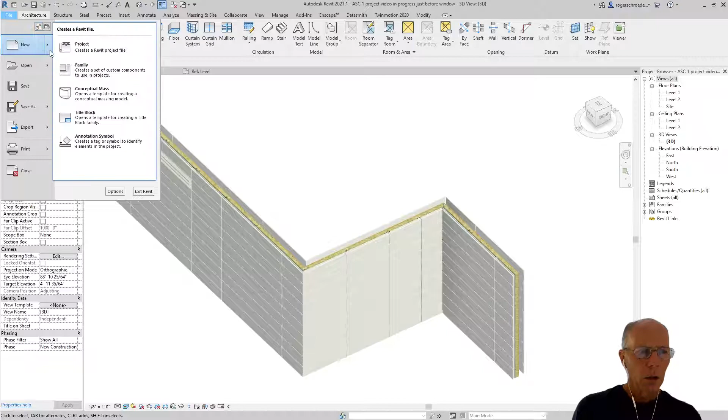So let's go ahead and actually open up a new family that is a window curtain wall. And when we do, we'll see we're presented with the floor plan view, and you can see where it labels the exterior. This is the plane of that curtain wall construction, the reference plane, and it helps us delineate where the front to the back is.

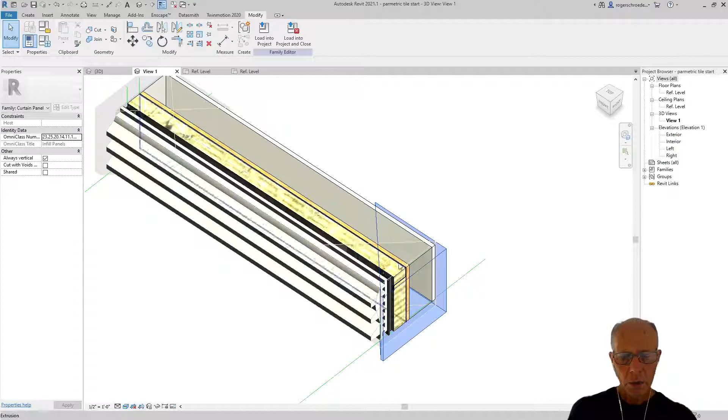And if we go back to the actual panel that we're making, we have to figure out where that reference plane is also with respect to that. And this is the whole key to why I really want to go through the details of rain screen components, because this idea of window placement, how it looks, how it is with respect to that exterior terracotta tile and the interior wall, I think are all really critical aesthetic decisions that you make.

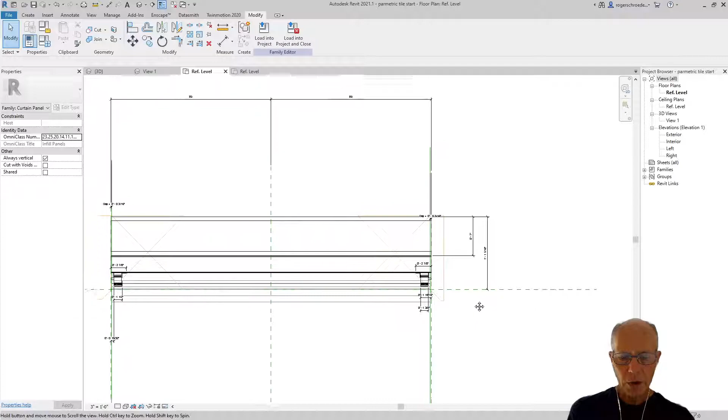So here we have the reference level on the tile system that we're using with respect to the curtain wall panel that we're doing. And so everything moves backwards from that face of the flat panel, and it moves back 1 foot 1 1/16 inches. And then I've dimensioned also to the face of the drywall on the interior. And this plywood sheet here, that's the extrusion of the airspace. I'm having a hard time grabbing the specific. That's the plywood panel. And so that assembly is 7 inches thick.

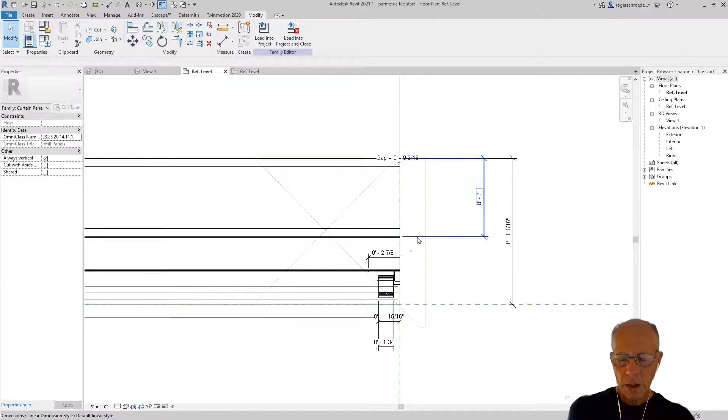So just some relative dimensions that we want to use so that we understand where our glazing is and how much depth we need for our frame. The important thing of the 7-inch depth is that's where the flange would come over to catch the window system on the face of the assembly, so to speak, the plywood or whatever other exterior sheathing might be involved. So we'll move back to the reference plan of the window that we want to create, and right away I'll do a save as.

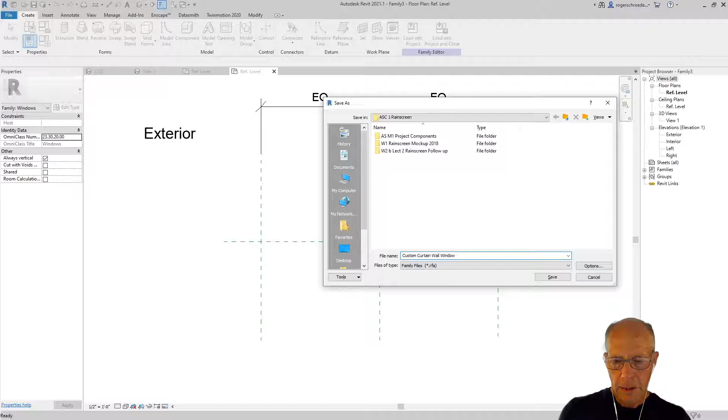We'll say this is a family, and we'll call it custom curtain wall window. And I'm going to add a reference line just for clarity, and we know that needs to be 1 foot and 1 1/16 inches away from the interior. So here we have the face of our terracotta flat tile, and then the interior part of the wall. So we know we have to cover that gap with our jamb.

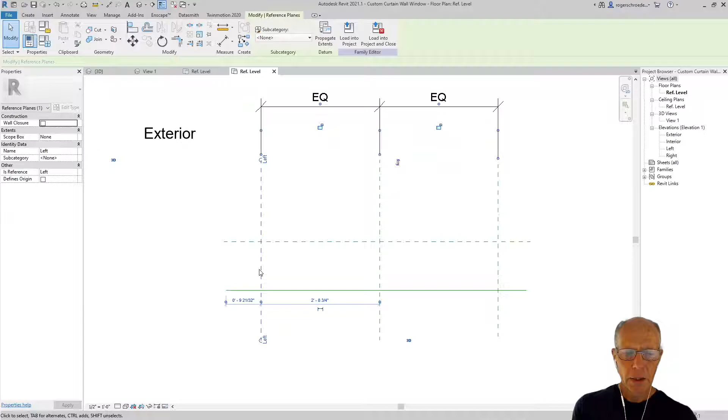So in order to create that window system, we need to have a profile that we can extrude around that. So we're going to use a profile. We're going to have to construct some sort of a profile based on those dimensions. And we'll get started with that, and then we'll extrude that around this shape. So the next thing I want to open is a profile. I'm going to open up a new family.

And I wish I was always going into my Imperial. I got to fix that.

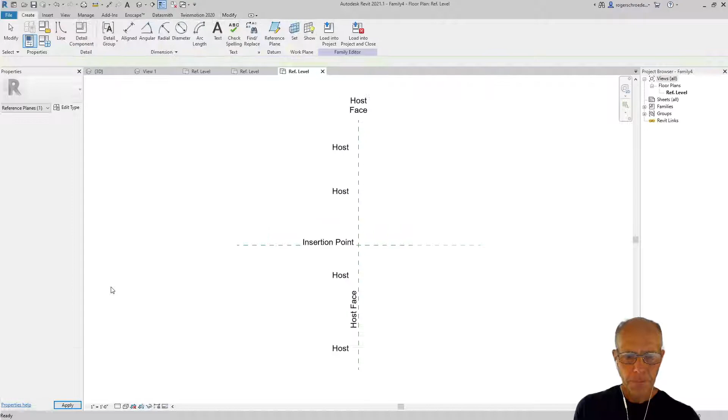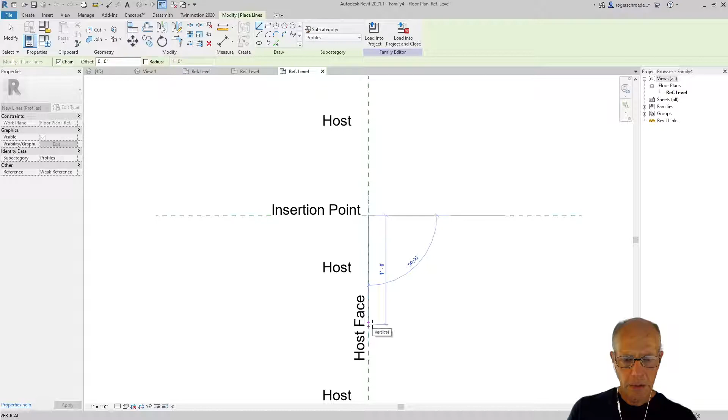And we're going to get a profile hosted, insertion point, host face. These always confuse me a little bit, so I'm not going to be overly critical, because I'll usually have to go back and make a little bit of a correction. So once again, let's just start drawing some lines so we can get an idea of where we're working here. So I'm going to draw a line that is 1 1/16 inches long. Let me just modify that.

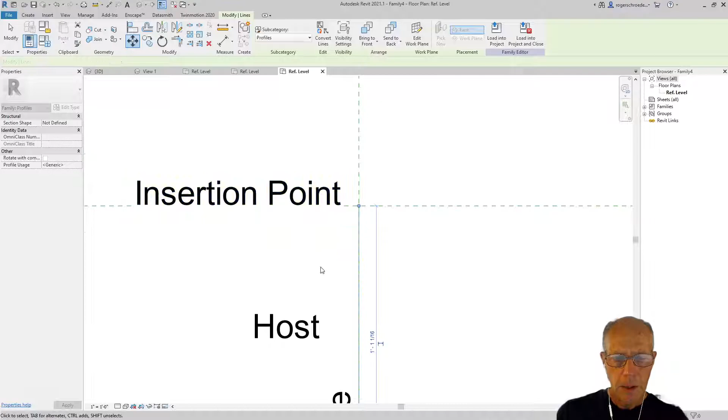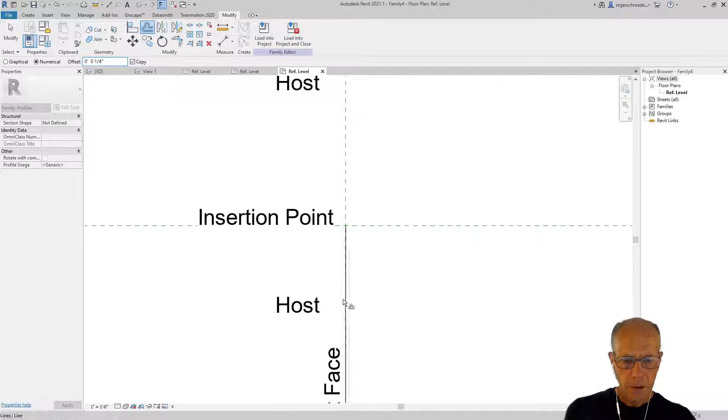And of course it extended in the wrong direction, so I'm just going to move this down. Okay, so that covers from the front edge of the tile all the way back to the drywall. And let's go ahead and offset that. So I'm going to grab the offset tool, and we'll make this kind of robust. We'll make it a 1/4 of an inch offset, the thickness of the aluminum. I'll pull it off to this side. So now we have kind of the start of what our frame would be.

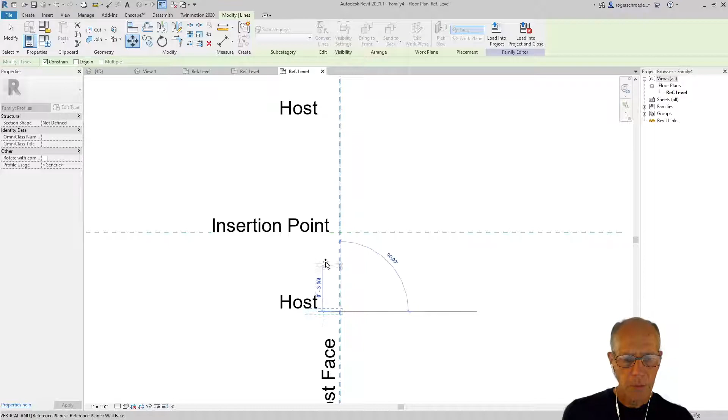We also know that we want to have a flange that's going to catch the outside of the window frame. So I'm going to draw another line here, and we're going to come down 7 inches. Well, actually, we'll just have to physically move this. I'm sorry, I'm doing this in a little cumbersome way. I'm going to put this back up here, and then I'm going to move it down 7 inches.

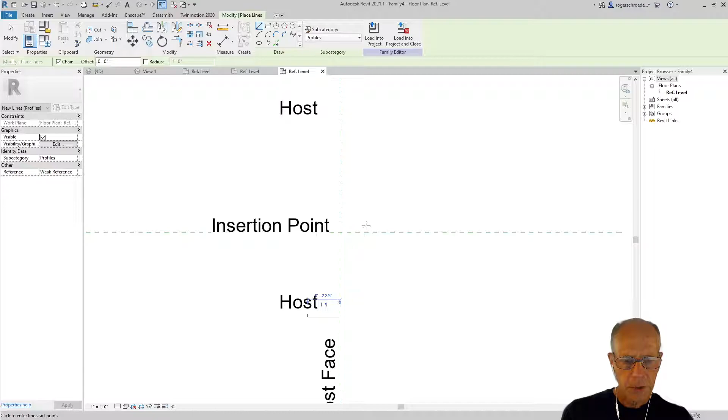Okay, so that's the face of the drywall, and I'll go ahead and offset that so it's a 1/4 of an inch thick, and we'll just continue off with a couple of lines here to finish this off. The important thing about a profile is it has to be totally closed. So I want to make sure I complete all of the closure of it.

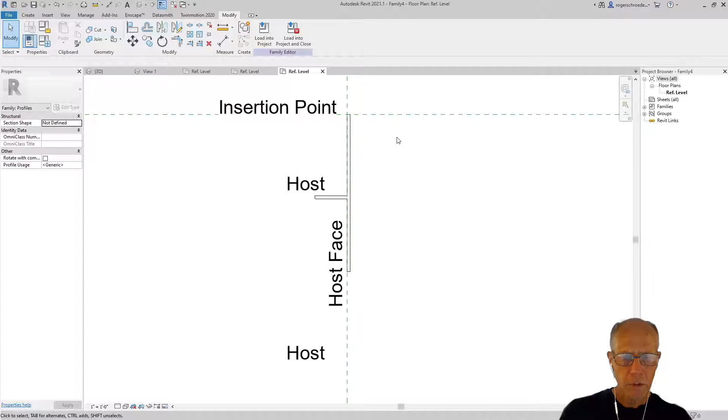And remember, this is now going to be the inside glass where the glazing goes, and down here will be the inside of the wall, and hopefully that'll be the outside of the wall. And maybe what I'll do is I'll just give us one other little feature that will help us determine where the inside of the wall is, so we know we have the profile in the right direction. So what I'll do is I'll come out over here, and I'll extend this line out a little bit.

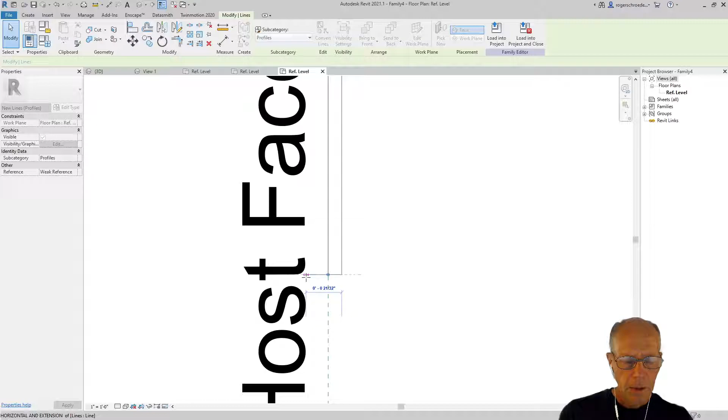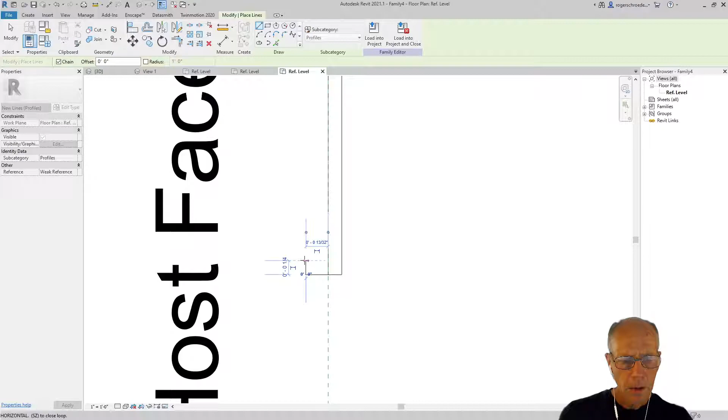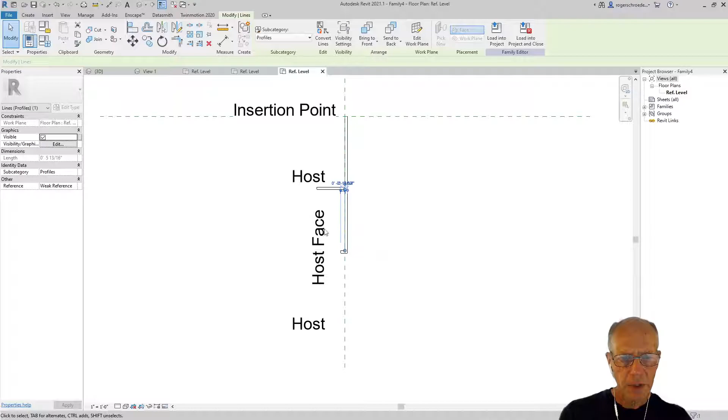I'll move this over because it's in our way there. Whoops, didn't catch my point. And I don't have this unchained. Okay, so now that we have this little divot on here, that'll tell us if we've got this profile facing in the right direction when we put it in our document. So I'm going to save this. I'm going to do a save as. We'll call it frame profile.

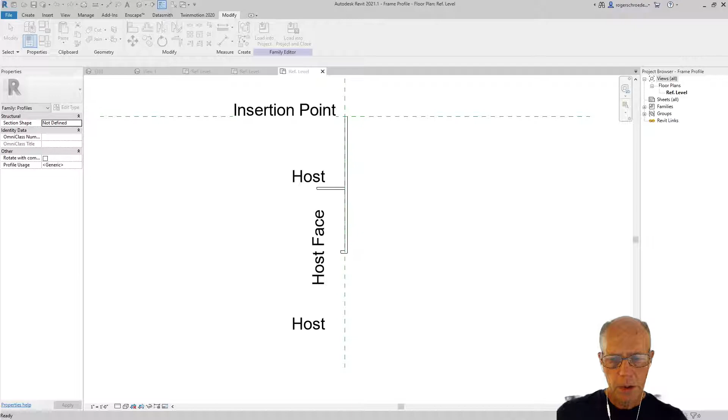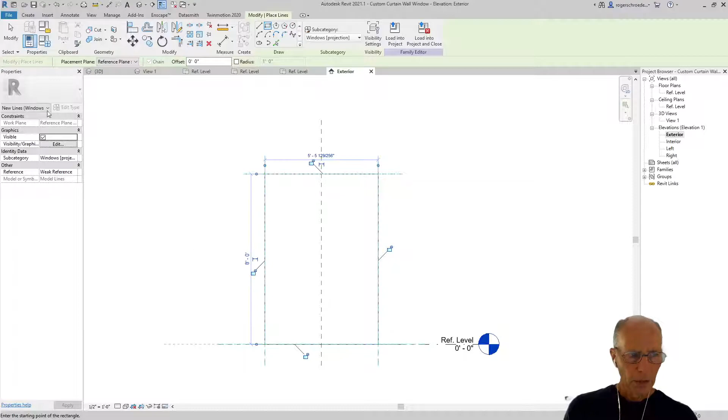And we're going to load that into the project. We want to put that into the custom window. And nothing's going to show up. We're going to go to, I guess it could be an interior or exterior elevation. It really doesn't matter. But we're going to create a profile. I'm going to make a model line. And that brings us right to the edge of our tiles if we insert this in the curtain wall system.

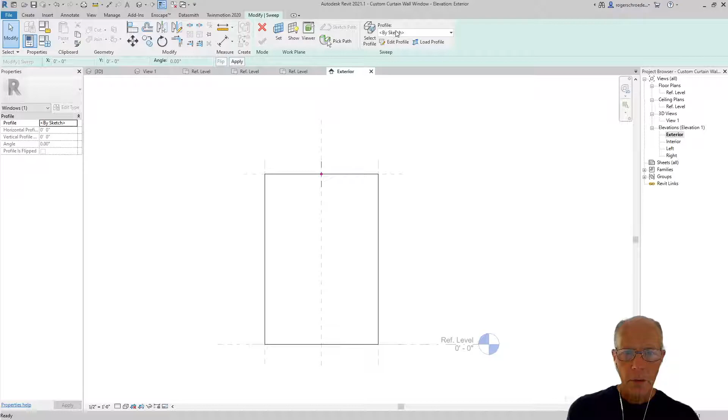And now we're going to create a sweep. So we're going to pick a path. And that's the lines I just drew. And we're going to now pick a profile. And we've already loaded in the frame profile we created. And we can actually now look at this in a 3D view. Let me just zoom in here. And actually, we just really kind of lucked out. It looks like it's all moving in the right direction.

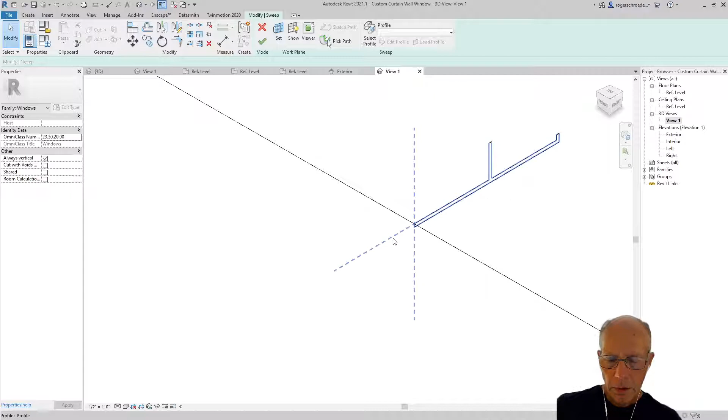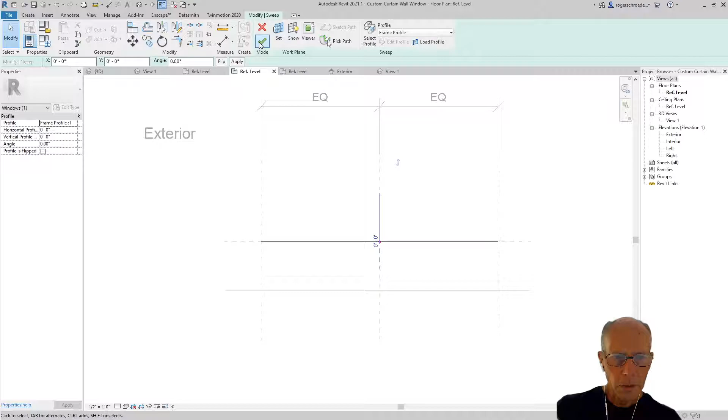So here we have, this is the outside face of the building. I think, let's just check again. Let's go to the reference level. Oops, that's the reference level of the thing we're going to insert. It's actually moving in the wrong direction. So we actually need to flip this. We just need to flip it over. So let me go back over to this view, select this profile, and flip it again. Nope, we want to rotate it 90 degrees. Sorry, maybe 180, I meant.

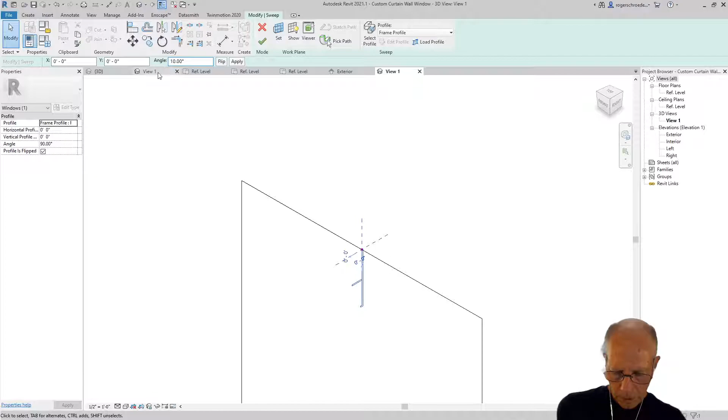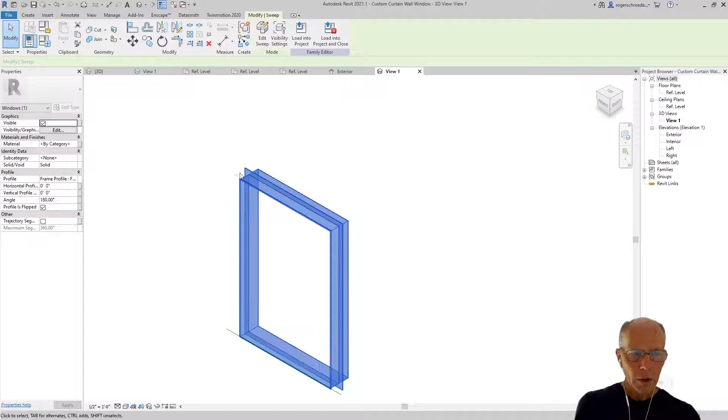All right, now let's just zoom in. So now you notice it's moving back in the right direction and it's facing to the outside of the building and it's lined up with that inside edge. So it's now in the complete right orientation. So I'm going to click complete and we now have a frame system for our window. And I'll go ahead and save that and we're going to load that into the project right away so we can actually insert this window. So we're going to load that into the project video that I've been working on, or your own project.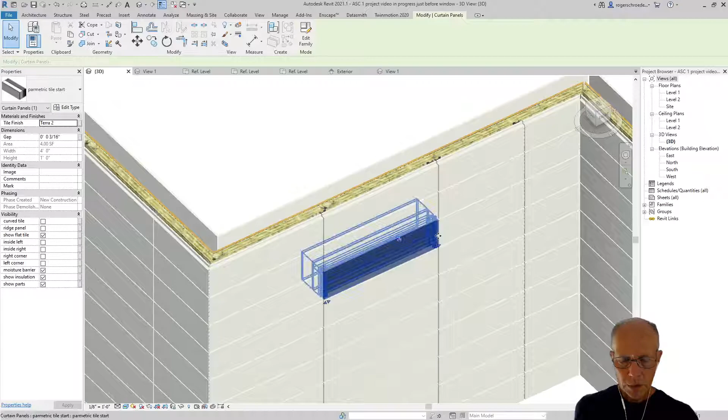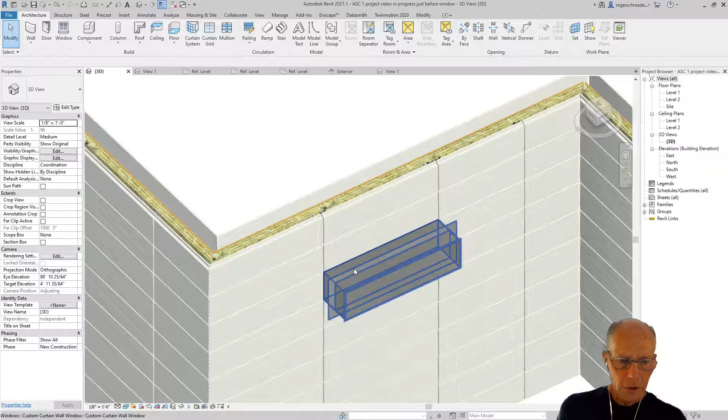And then let's start to create a place to insert this. So I'm going to tab in here until I can grab a couple of tiles, or I'll just grab this tile and unlock it. Because what I'll do is I'll just insert this window and then I'll cut this video to an end. And we're going to substitute that tile now for a custom curtain wall window. And it looks like it's totally backwards. So the exterior and the interior seem to be kind of, let me just hit the space bar here and see if that changes that curtain wall around.

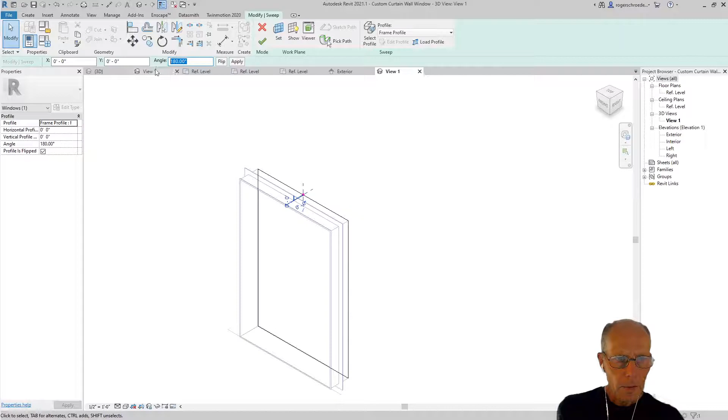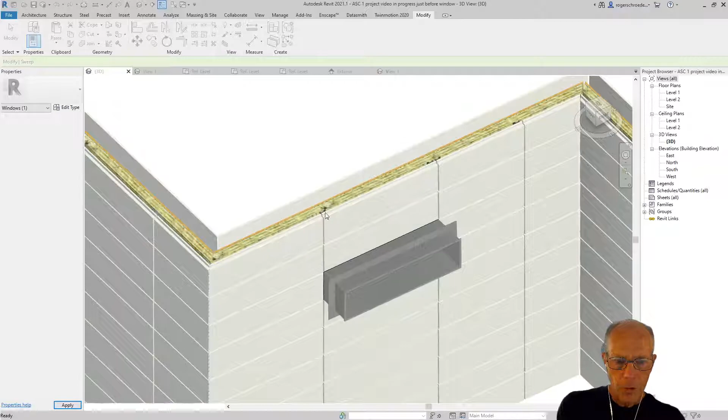My curtain wall happens to be in the wrong orientation. So we need to actually make our window just in the flip side orientation. So I'm going to go back to this sweep. And we're going to go back to where we were. I'm just going to go to 180 degrees, apply, and flip it so that it's in the right orientation. We'll load that back into the project and overwrite the existing. And now we have our window panel inserted into our assembly.

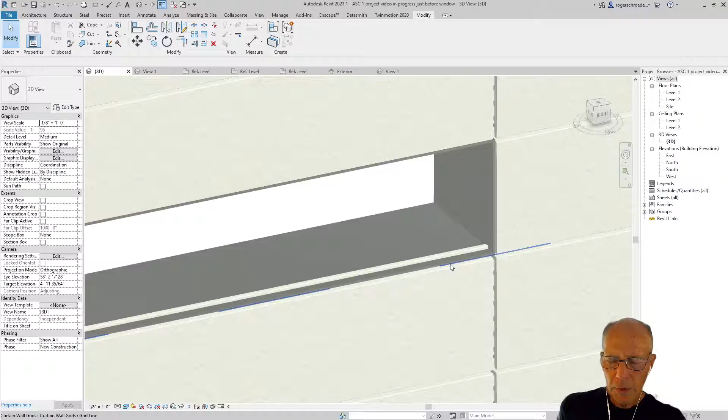And you can see there's a little issue here, which is why I like to do these kind of details. This bottom part of the window assembly is too close to where the tile and the clip system would be to retain that window. So we can make some modifications to our window system in order to accommodate that need for that extra clip at the bottom. And we'll do those little details in the next clip or so.